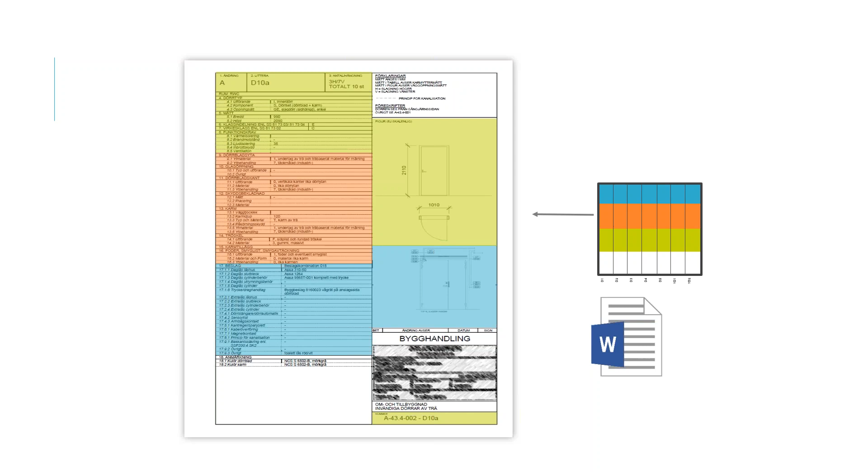That was an overall how we work with BIMeye, and all applications almost the same structure and same work methodology. Today's viewing is about the Revision Manager, the application that tracks all the changes in a project in an easy way. We can access the changes in a project easily through our cloud. The question is, why shall we use the Revision Manager, or why is it so powerful?

First of all, it's a simple tool to add and track changes in a project. Second, you can add the changes and synchronize them to the database, and everyone in the project can easily read and see what's happening during the changes. We can take the changes and create a report template, or a report to a PDF. I'm going to show you in a few minutes how you do that. It's an easy way, a safe way to track, and overall it's very easy to add information, read information, and share information.

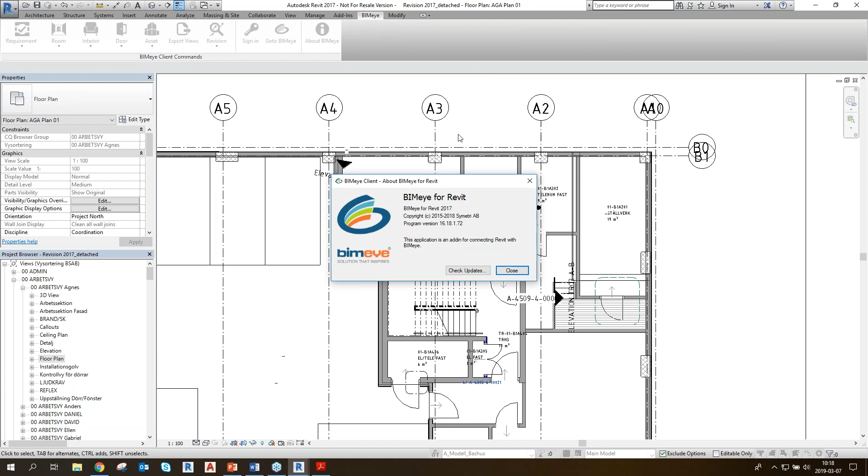The first one here is called BIMeye. When I click on BIMeye, I have a lot of new information. In the add-in, first of all, I'm going to check if I have the latest version of the BIMeye client, and I'll click update here to see if it's the latest.

Yeah, I have the latest client for 2017, which is what I'm demonstrating with you today.

The second thing I'm going to do is copy the project GUID here and connect my design tool to the database. I'll go into the sign in button, enter my username and password that I received from the BIMeye team, and open up the project GUID lock to connect my database to the model.

I'm going to go back to the client, or the platform, take the project GUID, copy it, and paste it in here. For the first time, I also have to give the model a name. In this case, I'm going to call it Revision 2018.

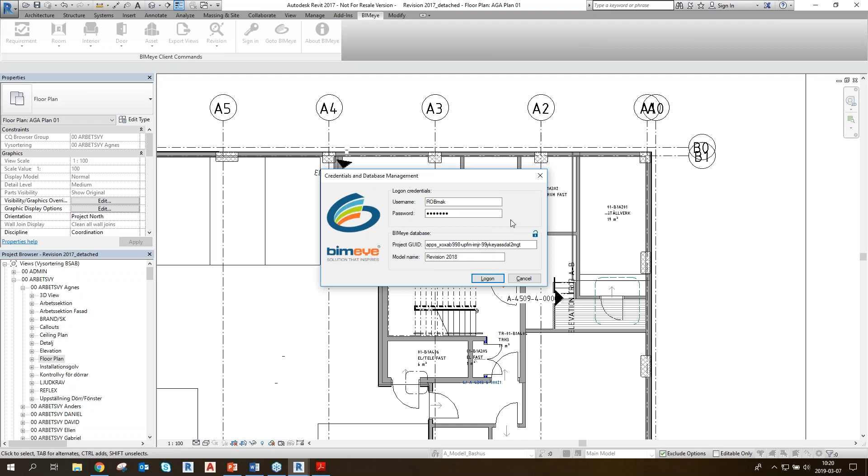When I'm done with that, I'll click on log on. Once it's successfully logged on, I'll hit OK, and then I'm ready to start synchronization from the model to the database.

So if I go back to BIMeye and see what information I have here. First, I have overall information about the project, and then all the applications I'm working with today. I can see the asset manager, door manager, interior, requirement, revision, and room manager. I can hit on each one and see what kind of information I have.

I can take the revision today and see this is the model name that I typed in. I can see when I did the last full synchronization, when I did the last synchronization, and what kind of synchronization I did last time, and what's been done in the project — whether something is new, updated, or expired.

Overall, here I have a little bit of information that's good for the project. In the help section, I have a feedback button and a support button, and I have the information button. This is the site I will come back to.

Over here I have the application buttons. When I hit it, all the applications are shown, and I choose the one I want to work with — in this case, Revision Manager. So I'll hit on Revision Manager here, and I'll enter the database and the matrix that I'm going to work with today.

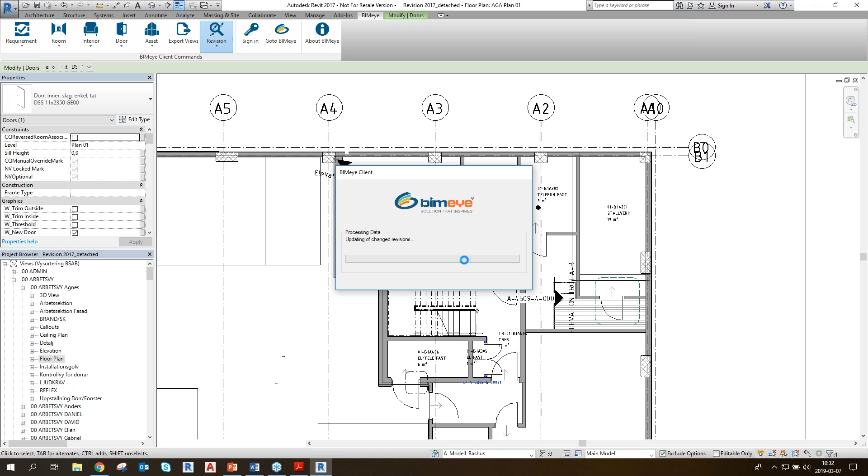I'm going to edit changes. I'm going to immediately see now the changes that I've done in the database are now in the model also.

See that. And when I've done this, I can now do the other applications. I want to insert now a 3D cloud. When I hit the 3D cloud...

I want now to take this door for an example. I want to hit the 3D cloud over there, and I want to bring more clouds. I want to now use the same case here. I want to pick a room that it belongs to, so I can get my information over there. And now I want to assign this to Benny over here, and the description is new door.

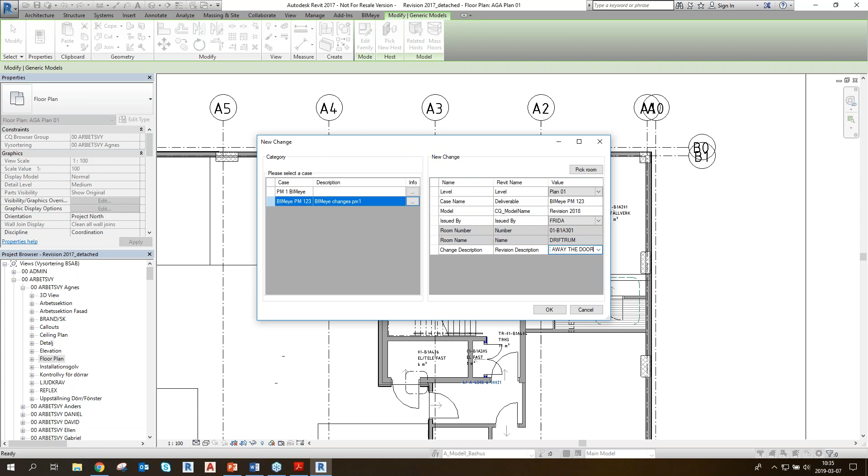take away the door. Now hit the OK. When I've done that, I'm gonna update my parameters in a few seconds here, just to secure that all the information is correct in the database. So I'll go back to my database. I will refresh my site over here, and I will see the changes immediately come to the database.

Now, if I go back now, I want to show my changes, connect it to my PM, and see if I go a little bit closer, they are blue. These changes are connected to my BIMeye PM 1, 2, 3.

So, in an easy way, you can now control your changes. You can create several cases at the same time. If you're working with different types of changes, if from this example it's changes around doors, you can have a revision set up just only for the walls or for the stairs, etc. It's up to you how you want to work in the project and what is the easiest way for you to work and add information and take care of the information.

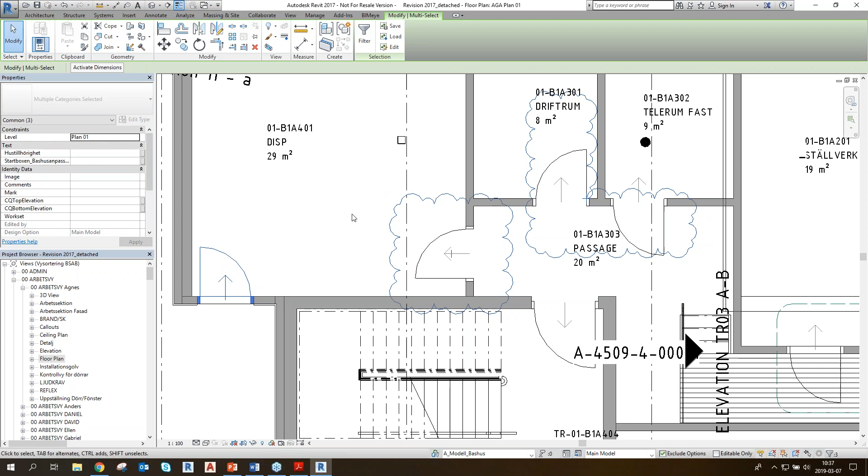When I've done this, this is the 3D cloud that I worked with in the revision, the BIMeye Revision clouds. I can also choose to work with the Revit own 3D revision cloud. If I go to the annotate button, I have the revision cloud over here. I can easily just enter it, and I can assign a change to, say, this door over here.

I can hit it, and I will click on OK. When I've done that, if I hit it once, it automatically will change the 3D cloud, the revision from Revit, choose the sequence 13 here, for an example, and the latest and active PM case that I just created in BIMeye.

I can choose whichever PM that I want to assign this change to. And now I want to connect this cloud, this revision, to the BIMeye. How do I do that? I enter it once, I choose the revision here, I want it to go to PM, BIMeye PM 123, and I will add a comment to it here. I'm gonna hit test 1, 2, 3 here. I'm gonna hit OK over here.

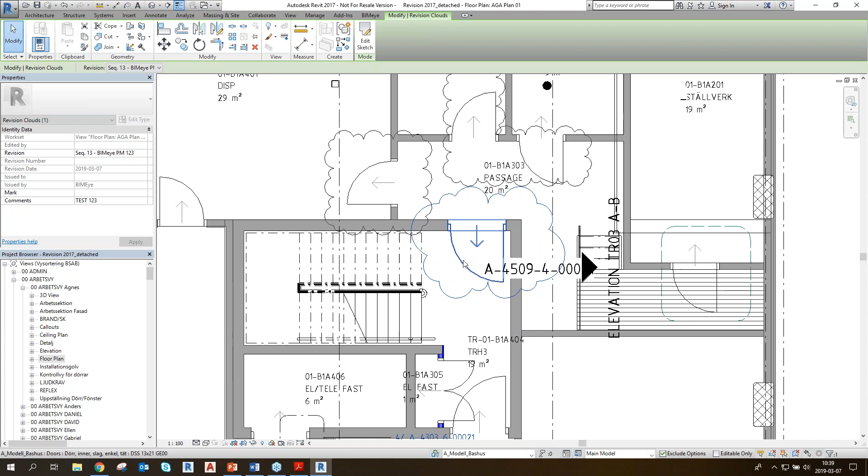I'm gonna assign this also. That one, I have the test 1, 2, 3 here. I want to pick a room even to this one. I have the information, and I hit OK there. And I'm hitting OK all the time. Go back to BIMeye, go to revision, and I update my parameters. Click OK. Go to BIMeye, I refresh the site.

And here you have the test 1, 2, 3 that I just added. This is the revision from Revit that I connected to my BIMeye now database. It's very easy, very safe, and very easy to access the information from the database.

And inside Revit, I can also now update my sheets here. If I want to update my sheets in my stamp, I can either let Revit go through all my sheets in the project and add the information that I just changed, the PM1, or I can select where my sheets are.

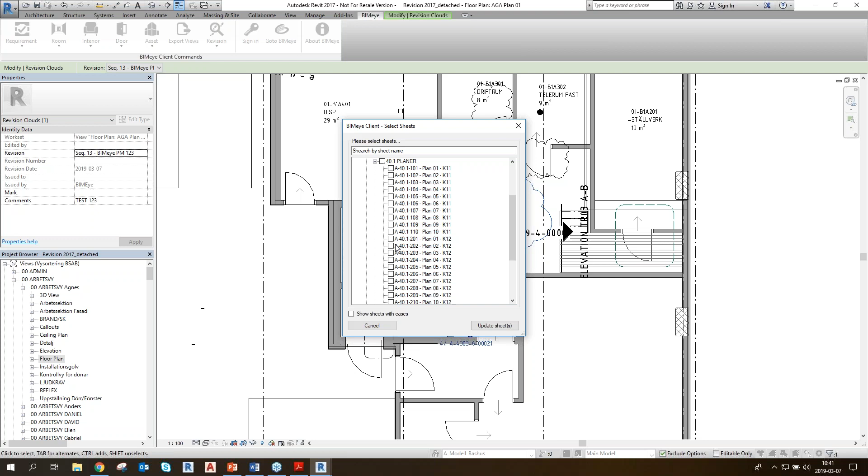In this case, I have around 450 sheets, so it's going to take a little bit of time to go through all of them. If you want, you can do an easy way: just go into the plan and choose the sheets you want to select, and they're going to update in an easy way.

And here I can just type in the information that I just want to have in my report, and I'm going to hit the save button, and I will immediately just create a report here. And when I open it up over here, I'm just going to download it, and when I open it up, I have a Word file that I just create, with the sheets, what kind of information that I just configured to my report template, and what the changes are.